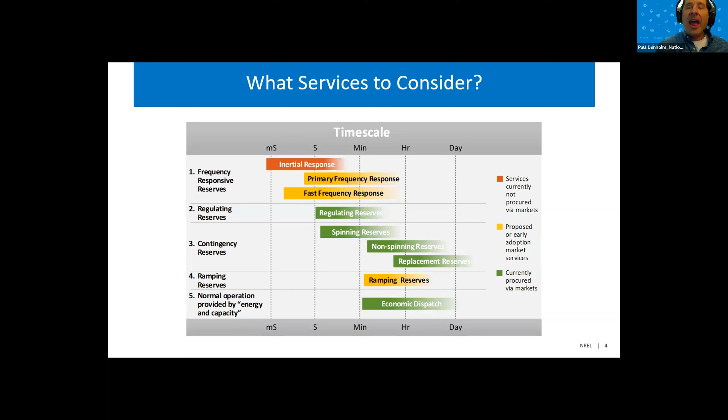So that's the early stage of storage. So when I talk about these 1 hour or less than an hour batteries, a lot of this storage went into those markets for contingency reserves, frequency regulation or regulating reserves. And so we spent a lot of time talking about that. But maybe we don't need to talk about it as much anymore.

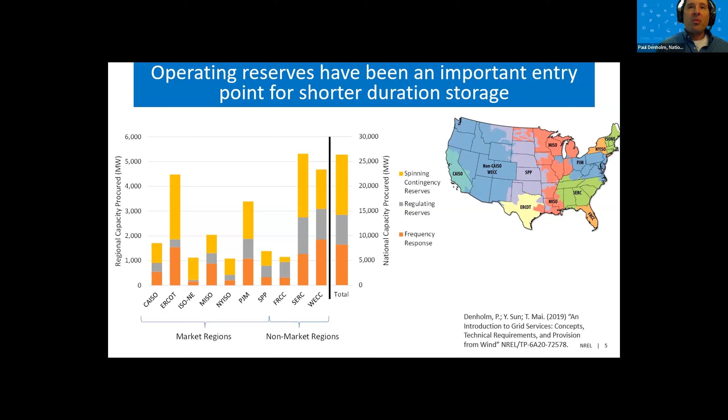This is the capacity required for 3 general classes of these operating reserves. And regulating reserves is the one that storage kind of went after most. And so it's significant. It's several thousand megawatts of capacity. But how does that compare to the amount of capacity we need for peaking or firm capacity? It's a pretty small fraction.

These markets are rapidly saturating or have largely saturated. There's not a whole lot of room for growth for provision of ancillary services. There are some in some places, but in California, the entire regulating reserve market is 300 to 400 megawatts. So there's not a whole lot of room for growth in terms of providing ancillary services from storage.

The focus has really shifted to the provision of peaking capacity. And that makes sense not only because of saturation of the ancillary service markets, but because peaking capacity is now cost effective. We've achieved the break-even point for lithium-ion batteries being cost competitive on a life cycle basis with a peaker, something like a flexible aeroderivative gas turbine.

So if you do a full life cycle cost calculation, 4-hour storage can now compete against a new peaker. So if you've got load growth or if you've got an old peaker that's retiring, storage is now cost competitive. And we're seeing a lot of the storage going in for this capacity resource, particularly that 4-hour storage device.

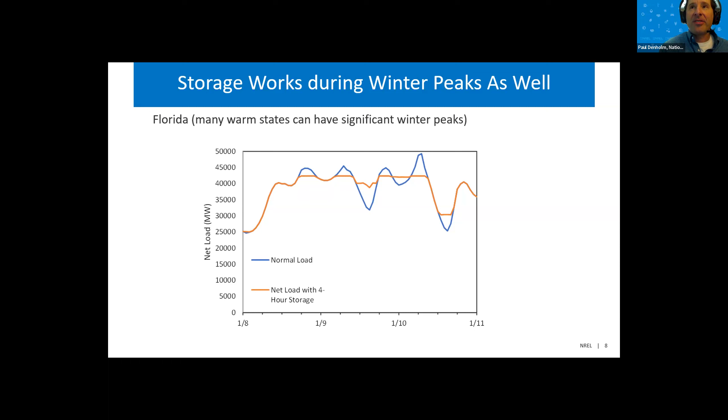Storage often does work in winter as well. You can clip the weird diurnal peak shape, but we're going to come back to this because winter peak is where we're going to see some differences in what particularly 4-hour storage can do.

Okay, so how do we understand the value of storage in providing firm capacity? Because we know that unlike a gas turbine, assuming it can get fuel, it can't run forever. So that's where we have to do some math to understand what is the duration required. So you can do something like an effective load carrying capability calculation to see how can I rate a storage plant. If I've got a 4-hour or 6-hour storage plant of 100 megawatts, can it actually replace a 100 megawatt gas turbine, or do I need to derate it?

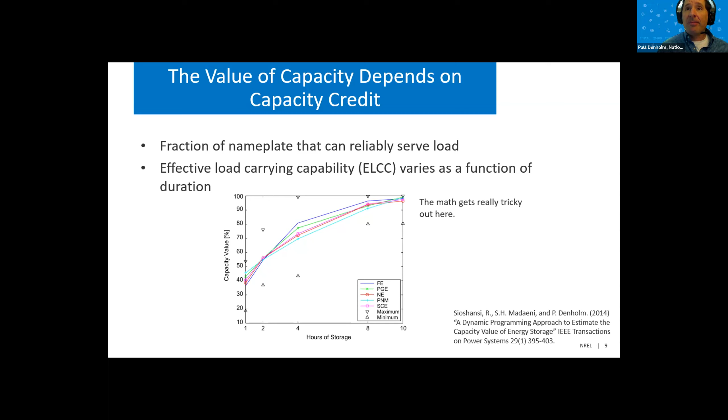And ELCC calculations can be pretty tricky. And so what a lot of markets have done is come up with this simple threshold duration rule. And that basically says, thou shalt have at least X hours to be eligible to get full capacity credit. Now you can be derated, and you can have this linear derate.

So if you had a 4-hour rule, like a lot of locations like California have, you could derate that plant. So if you got a 2-hour device, you could just derate it by half. So if you got a 100 megawatt 2-hour plant, you could rate it at 50 megawatts because you can then discharge it at 50 megawatts for 4 hours.

Okay, so this is what's been done today, and this is part of the explanation about why we saw that big cluster of 4 hours, particularly in California. You need 4 hours to get full capacity credit. So let's just build a 4-hour storage device. And now we can enter into a resource adequacy contract.

So load serving entities in California are required to demonstrate sufficient capacity to meet resource adequacy. So that can be done through bilateral contracts. So a load serving entity can sign a bilateral contract with a storage developer.

And as long as it's 4 hours, that load serving entity can then go to the California Public Utilities Commission and say, okay, look, I've met my resource adequacy requirement through a mix of resources, including some 4-hour storage. So that's what many markets do instead of doing an ELCC calculation, particularly because ELCC calculations can be quite difficult.

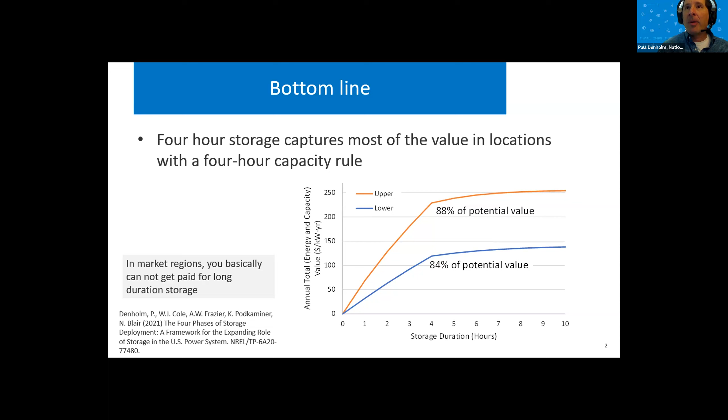This is why you see people building 1 hour storage for ancillary services, some 1 hour storage in places like ERCOT to take advantage of those extremely high price differentials that you see for just 1 or 2 hours per day, and then in places like California building 4 hour storage to get that combination of capacity payments and energy revenue. And 4 hours should be enough for now. When we do the math on these summer peaking systems, we see that 4 hours is enough.

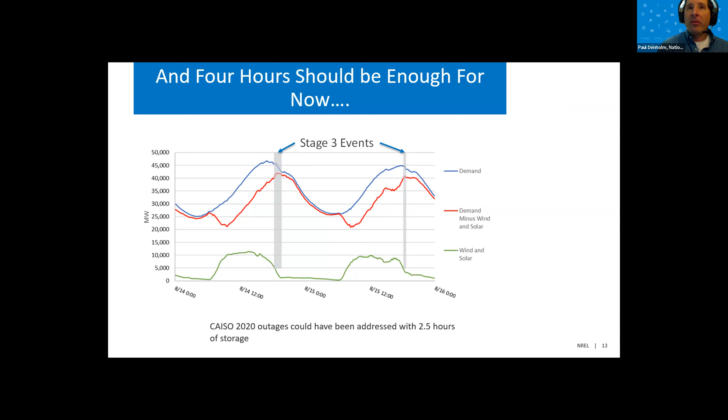Looking at it in a different way: when we've had incidents, especially in summer peaking systems, was 4 hours enough? In California, this is the 2020 outages, and the longest outage duration during those 2 days was about 2.5 hours. So if they'd had 2.5 hours of storage with sufficient megawatts of capacity, they could have avoided those outages. They require 4, but they certainly wouldn't have needed more than 4 to avoid those outages.

Okay, so what happens if we keep adding storage? I showed earlier this flat peak. Well, look what happens on the left. I add enough storage, and my peaks are now more than 4 hours long. And in some cases, it doesn't take a whole lot of storage until my peak is more than 4 hours long, and I would need to go with longer duration storage.

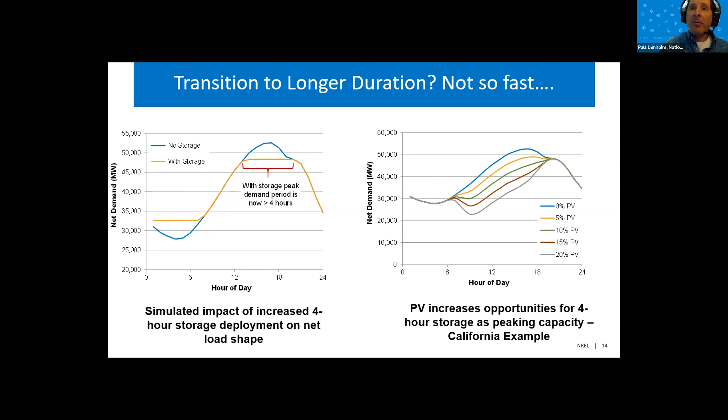And that is true, except again, in summer peaking systems, adding solar will chop off the left half of the peak curve and leave the right half of the peak curve for storage. The combination of solar meeting the first half and storage meeting the second half means that I can go a really long way with 4 hours. 4 hour storage will be able to provide lots of capacity for a long time in the summer, as long as we keep adding more and more solar.

Now you do eventually saturate, you do eventually get to the point where your peaks are longer than 4 hours. But quite frankly, the biggest transition occurs when we essentially shift to a net winter peaking system. And so this is the big deal. And quite frankly, this is the thing that scares me.

Like I thought I kind of had a handle on, oh, this is great. Solar and storage are going to work great together. They're a peaking resource. They're cost effective. We really nailed it. This technology is going to answer all of our needs for peaking capacity. But again, winter does happen, and we're increasingly seeing the shift to winter peaks.

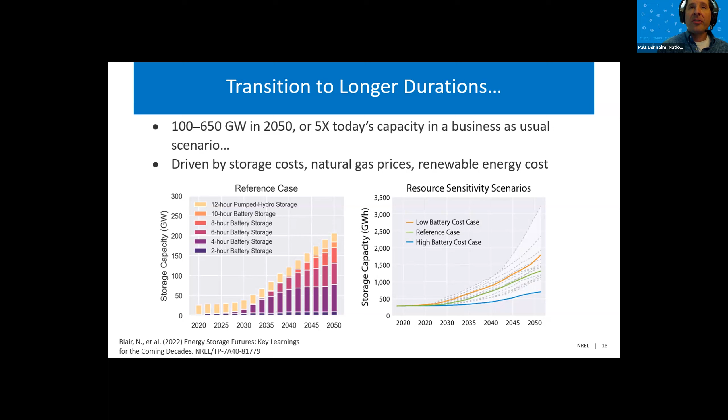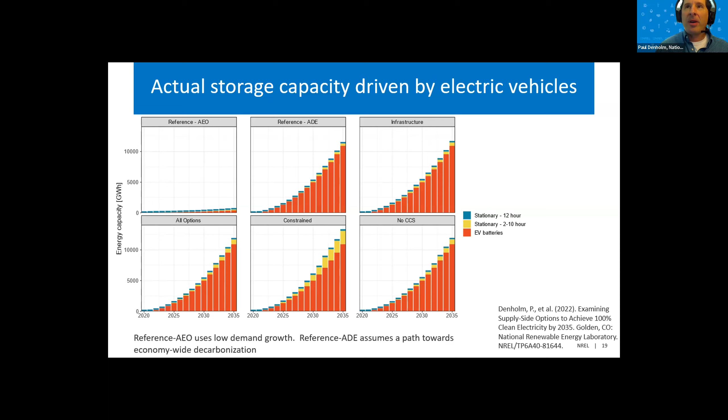That's not really core to my talk, but I think it's important to talk about just because, hey, are we going to be able to build all these batteries? Well, if we can't do it for stationary storage, we certainly can't do it for electric vehicles, because that's really the driving point. So I want to make sure that we had plenty of time for the other speakers and just give you this overview, because I really think the key points here are fairly simple, and that is storage is cost competitive as a source of firm capacity.

So if a utility comes in with an IRP saying storage is the way to go, that raises questions: well, what about traditional resources? That's why. It's because it's cost competitive. And quite frankly, I'm fairly skeptical of IRPs that would come in and say no storage, because again, we're seeing the numbers pencil out.

Now, we do have a recent increase in commodity prices, and we'll have to see how that has affected recent prices. So there may be a temporary blip there. But I do believe that, straight up against the peaker, storage can increasingly compete if you do the analysis correctly. And then again, I think 4 hours is plenty for now and will be plenty for the near future, but it's really this transition to winter peaks that will drive durations beyond 4 hours.

Now, I didn't talk about technologies, and happy to do that, but one thing to keep in mind, of course, is that lithium-ion battery prices are declining. And so increasingly the competition against a 4-hour lithium-ion battery may be a 6-hour or even an 8-hour lithium-ion battery. But there are a number of technologies that are really important to consider, and some of them are emerging in various stages of technological maturity.

But it's great that we have a transition to a talk on thermal storage, because I think thermal storage is often overlooked. We've got a lot of kind of exotic battery chemistries that I think have promise. Again, I'm still a big fan of pumped hydro, but we really can't ignore all of the different technologies, including thermal storage, which will be the next talk.

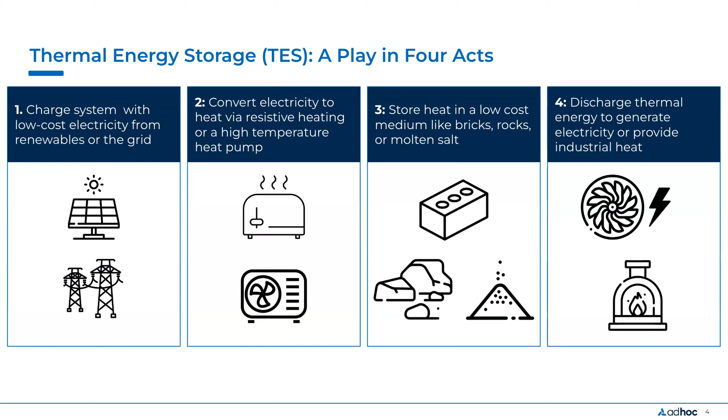When we look at thermal energy storage that's going to be converted back into electricity, generally the application for this, as Paul just alluded to, is for long duration energy storage. And the reason why thermal energy storage is seen as an attractive long duration energy storage application is precisely because that energy storage media, the rocks, the bricks, is so inexpensive.

This means that as you go longer in duration, all you have to do is add more of those rocks or bricks. So while you might have a relatively expensive turbine generating the electricity, that turbine gets amortized over longer and longer durations as you add more and more rocks, making the slope of this long duration energy storage cost line significantly less than lithium ion.

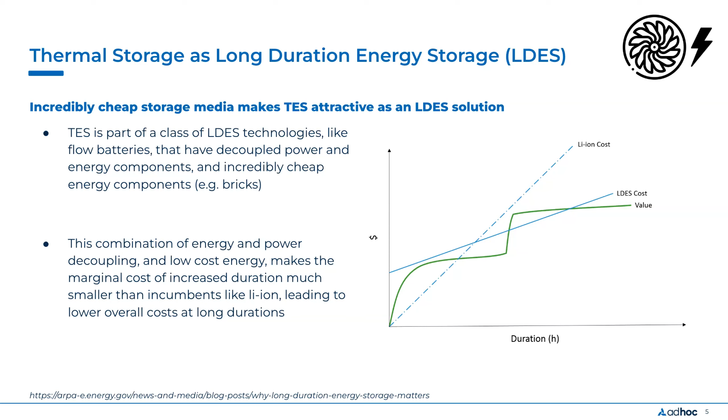Now, for that to be valuable at all, generally you need to get out to a duration, as Paul sort of alluded to, where you're adding some value other than just the energy arbitrage, where it has diminishing returns with duration. And instead you need to be on a system that values that long capacity, and it could be in that winter peaking type scenario.

Transitioning away from the long duration storage application, the bulk of what I'm going to be presenting on here is really thermal energy storage for industrial heat decarbonization. And so this is really what happens when you take that heat and instead of using it to return electricity to the grid, you use it to drive industrial processes. And this is a really large opportunity.

So over 20% of global CO2 emissions are derived from industrial heat. So this is the heating of industrial processes like metal treating, like coking, and a lot of boiling activities. A lot of manufacturing processes use steam in one way or another. That steam is generally generated through a fossil fuel boiler.

So what's interesting is thermal energy storage is able to store this heat relatively inexpensively at very high temperatures, so temperatures in excess of 1500 degrees C. And these temperatures are able to address 95% of these industrial heat applications. And once you're using that amount of energy in these thermal energy systems, it provides some really interesting opportunities for how it might integrate into the grid, which I will get into.

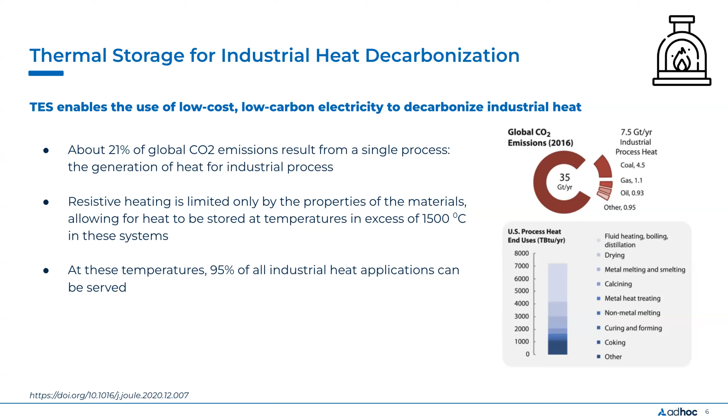So to understand the opportunity here, it's important to understand why this is an opportunity now and what the underlying economics of this opportunity actually are. So why now? Why is this an interesting opportunity to electrify industrial heat through thermal energy storage? And the answer is really the falling cost of renewables. So just as lithium ion batteries have plummeted in cost, so too have solar panels and wind turbines.

And when you look at some markets now, here I'm showing California, when you look at the cost to produce steam using power from a solar PPA versus the cost to produce steam from an 80 to 85% efficient natural gas boiler, you can see that we've actually reached a crossover point where steam from the solar PPA is less than steam from directly fossil-fired natural gas.

This is really a relatively new and monumental phenomenon that you would be able to generate electricity at a per unit energy cost less than from a fossil source on a heat basis, because generally our electricity has in the past come from turning fossil fuels into heat and turning that heat into electricity. And all of those steps have significant efficiency losses.

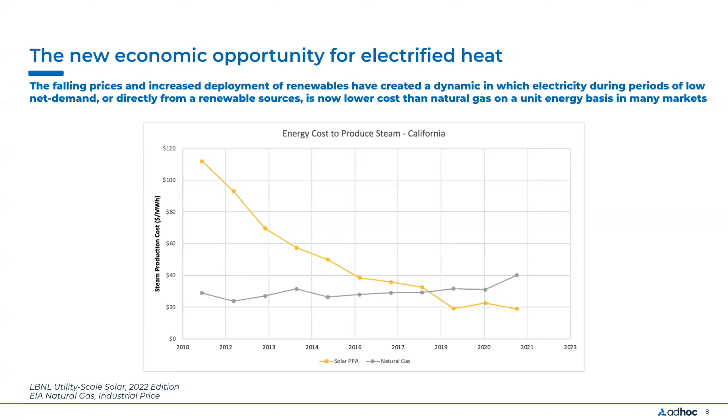Just looking one step further at the unit economics here, if we look at the US average natural gas price on just looking at what it costs to produce steam on a per energy unit basis, that's around $29 per megawatt hour. Now, if you just take the average US electricity cost and try to turn that into steam, it's over 2 times as much as that. So it does not make sense just to take grid electricity at the average rate and turn it into steam.

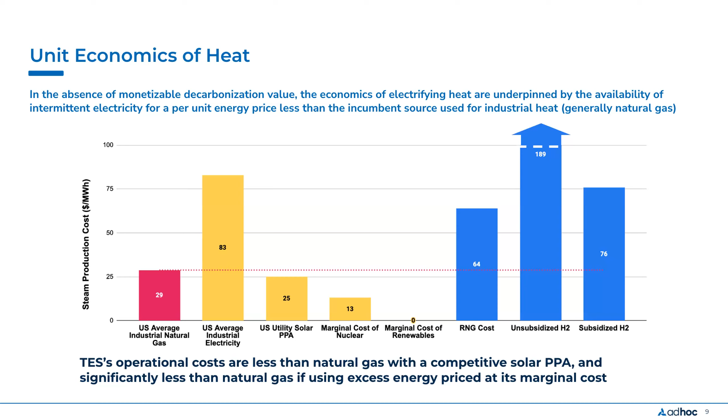But once you start looking at the value or the price of a solar PPA or the marginal cost of some of these resources, what they're actually bidding into the market, at certain times they can be significantly less than that average cost of natural gas. And we see that those costs are also much less than other kind of clean forms of heat, whether that be through renewable natural gas or through green hydrogen, looking both at the unsubsidized cost as well as the subsidized cost of hydrogen if you assume the full IRA incentives.

And so how does this actually interface with the grid, and how does the actual thermal storage element play? So one thing to think about when you think about the flexibility that thermal energy storage can provide on the grid, it's different than other forms of load flexibility we've seen in the past. Traditionally, programs that look to load flexibility on the grid are talking about some sort of demand response program. And in a demand response program, we're taking an existing load and we're incentivizing it to curtail itself at times of high net demand.

So this is saying the grid is strained. We need additional capacity on the grid. We are going to pay you, electricity users, to turn down during this period so that we have enough capacity on the grid. Thermal energy storage, on the other hand, is what we would call a dispatchable load. So this looks different in that it is actually being dispatched at times when net demand is low. And in its base case, it adds no new demand to times when it's high.

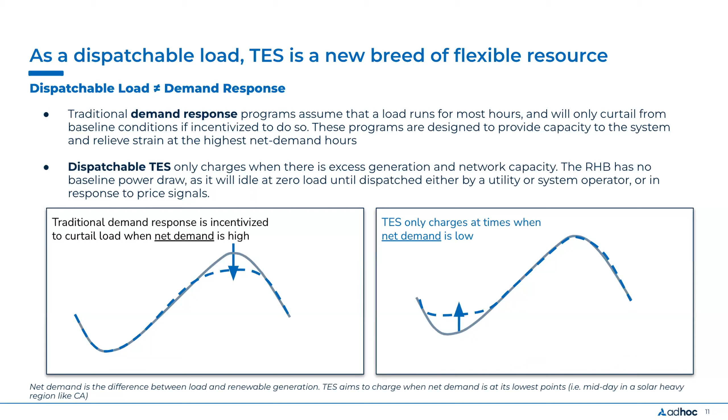So it will have preferably an economic incentive to be deployed at these times when there's excess generation on the grid. These might be times when there is solar or wind curtailment happening. And at these times of low price and high renewable availability, this is when this thermal energy storage wants to gobble up as much of that electricity as possible. And it wants to then be turning itself off well prior to reaching any sort of peak net demands on the system. So this offers a different paradigm and offers a number of highly valuable attributes into the system.

So one, this allows for us to electrify more load and bring more load onto the system while utilizing existing system assets. So this allows for load growth without substantial overbuilds of the T&D system, because these assets will want to be drawing power at times when utilization of that grid infrastructure is low. So it allows us to amortize those system costs over a larger load base.

These systems also naturally have quick response times. As Paul mentioned, these markets for these sorts of ancillary services are fairly shallow, but there are still occasions where having a load that can provide these ancillary services can still be valuable in some locations on the grid. These are also very large. We're talking gigawatt scale flexible assets. So when we're talking about needing to put gigawatts more of renewable assets on the grid, pairing that with loads that are of similar order of magnitude with flexibility allows us to more easily integrate those new renewables onto the grid.

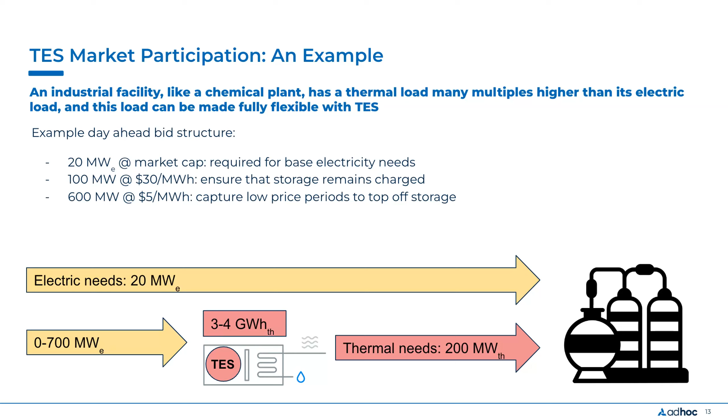So you can see the level of flexibility here is really quite dramatic. It's going from a base load of something like 20 megawatts to an intermediate draw at, say, 120 megawatts, all the way up to being able to ramp to 700 megawatts, if that's what the market dictates is most effective.

So what are the barriers and opportunities for thermal energy storage and heat electrification to actually participate in markets? There's a few challenges that are keeping these systems off the grid right now. One is interconnection bottlenecks, both for these thermal storage assets themselves, as well as for renewables.

Right now, there are actually bilateral deals happening in the market between renewable developers who aren't able to get through the interconnection process to bring their energy to market, and thermal energy storage providers and industrial heat users to, instead of connecting that project to the grid, connect it directly to the industrial facility. Now, from a system perspective, this is suboptimal because we would like to see all these resources integrated into the larger market. It's the market that can help us drive efficiencies and decarbonization economy-wide.

Similarly, there are also accounting protocols in some carbon markets that are incentivizing those bilateral agreements, such as low carbon fuel standards, which force an industrial facility to use a grid average emissions factor if they're generating their heat using grid power, even if they're intentionally doing it at times when we know the marginal emissions on the grid are low. This incentive is driving towards direct connections instead of grid connections.

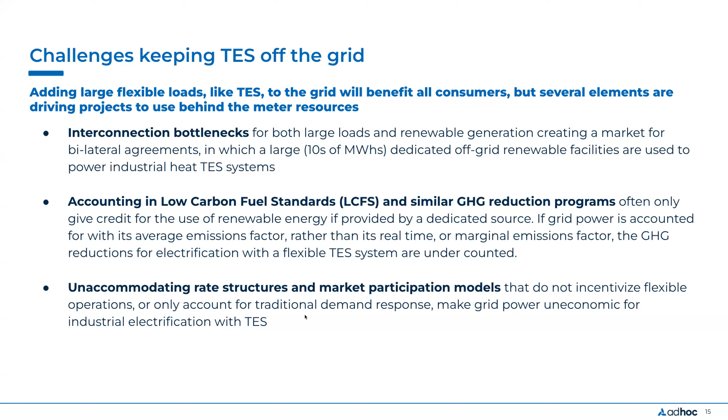So the market rules are really going to dictate what stakeholders can benefit from thermal energy storage and where these solutions actually get deployed. As I mentioned, one of the key factors here is access to the underlying dynamic price signals, something like the LMPs within an organized wholesale market.

It also requires that we look at reducing the number of fees that get put into volumetric fees as opposed to fixed fees, because these systems are very sensitive to the marginal unit cost of energy they're procuring. If a fixed fee is instead bundled into a volumetric fee, that will have a significant impact on the dispatch and viability of these systems. And finally, when we look at T&D charges and other demand charges, charges that are assessed on a coincident peak basis, i.e.

When the whole system is at its peak demand, are charges that these systems can proactively avoid, because they ideally do not want to be dispatching at periods when the system is at its peak. However, if demand charges are assessed on a non-coincident peak, that is the specific peak power that is drawn from these systems, whether it's at a time of grid strain or not, that can really be a killer for these

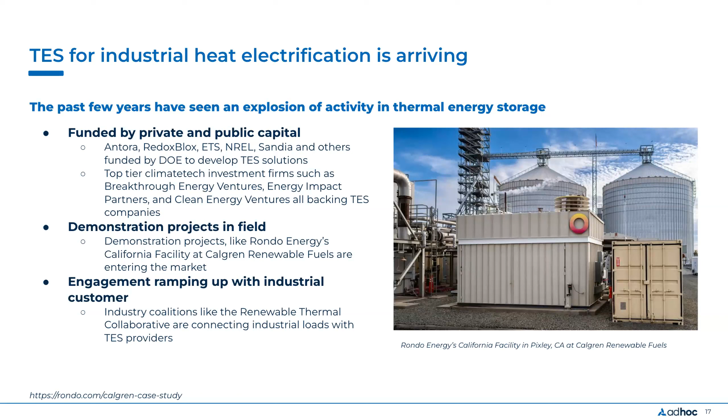So what I will leave this audience with is that this technology is arriving, and in some cases already here. So there's a lot of public and private interest in these solutions. As I mentioned, I'm working directly with Rondo Energy. This slide is showing a picture of their demonstration facility in California at an ethanol refiner. And we're seeing a lot of ramping up going on with industrial customers who really want access to this sort of solution. So I really look forward to talking with this group more in the breakouts.

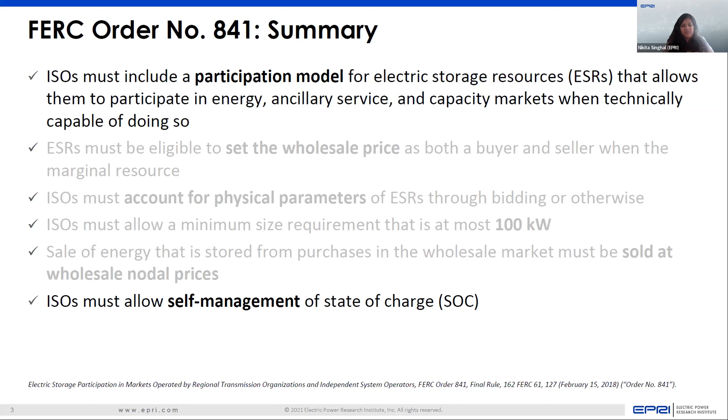I won't go into all the other requirements of the order, but the one key requirement that was significant was the fact that ISOs were required to allow for asset owners to self-manage the state of charge of the assets. And essentially, the ISOs should not solely be controlling the resource, so they shouldn't be operating the resource themselves, but rather also provide the developers with the flexibility to manage the state of charge of their own resource.

Now, what does a participation model mean? The notice of proposed rulemaking basically defined a participation model as a set of tariff provisions that accommodate the participation of resources with particular physical and operating characteristics within these wholesale electricity markets. It takes a lot to represent these physical and operating characteristics of specific resources within market clearing software. So we also mentioned that a participation model includes a set of market clearing software provisions that are required to represent these characteristics.

So essentially, participation model characteristics can include anything that would require change in the market clearing software to integrate a new technology. It can also include what kind of bidding parameters may be needed by a resource to interface with the market, what services they are eligible to provide, and how we can model those service provisions within the market clearing software.

Now, anytime a new technology begins to participate in wholesale electricity markets, there may be a need to introduce a new participation model, but it comes at a significant cost because this requires a lot of stakeholder meetings and also changes to the market clearing software that requires cost, right?

There is the option to modify existing participation models, but that may be inefficient because you may be trying to fit a particular resource into a participation model that may be meant for a different resource type. So you may not accurately capture the efficient features of this particular technology. However, it does have the benefit of being easy to implement and it's already understood.

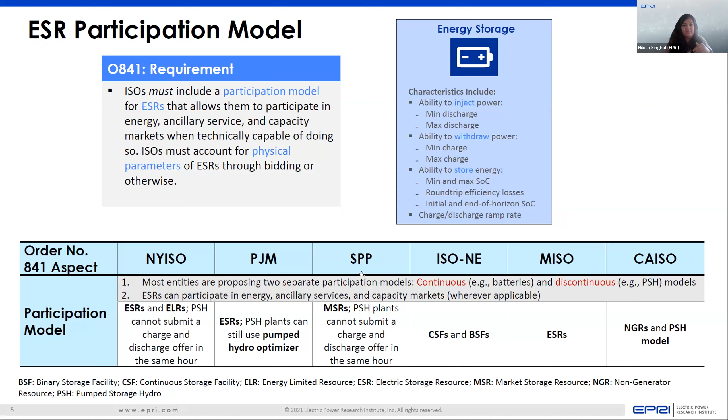So essentially what happened is most of the ISOs introduced two separate participation models, one for batteries, which is a continuous participation model, and the other for pumped storage hydro resources. I won't get into the details of what they call these participation models, but feel free to refer to this slide once you get a chance to.

Now, switching gears to the state of charge management of this specific technology, given that energy storage resources are energy limited, a lot of thought has to go behind how the state of charge of these resources can be managed. There are 4 different ways in which the state of charge of these technologies could be managed. One is self-scheduling the batteries, or the asset owners could manage their own state of charge. So that's referred to as self state of charge management.

And then the last two on the right side are state of charge management light and ISO state of charge management. These two features are when the ISOs are themselves managing the state of charge of these resources and the asset owners are not. The difference between these two options is essentially in the way the market clearing software is designed.

In state of charge management light, some ISOs are using a sequential design for clearing security constrained economic dispatch programs, as a result of which they optimize these assets on an interval by interval basis in a sequential manner. Whereas a subset of the ISOs solve the problem using multi-interval optimization, which is more efficient, because you get to look at multiple intervals in a single snapshot, right? So that's referred to as ISO state of charge management.

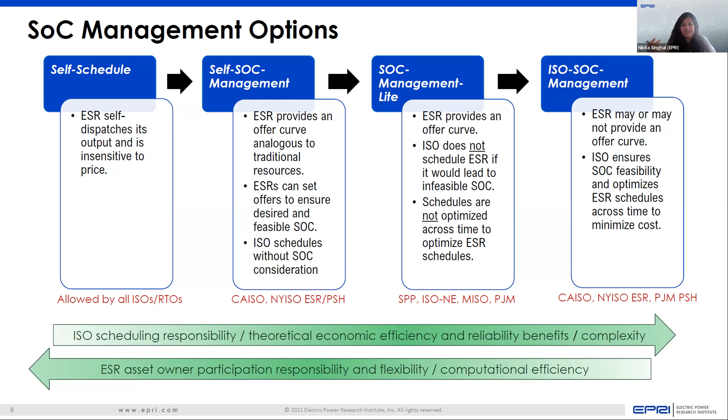We did a study to understand how these options would impact the theoretical economic efficiency and reliability benefits for a test case system, to better understand what role the state of charge management option may play. I'm going to briefly go over the results from that study. On the left chart, the results have been shown for a scenario that had low renewables and low penetration of batteries as well, whereas on the right side, the chart shows a high renewable scenario.

The first bar graph shows the operating costs that were obtained from the system without any storage. And then the same sequence as the previous slide has been maintained, wherein the second graph shows the self state of charge management costs. The option where you're sequentially solving the market is the third bar chart, and then the fourth bar is the ISO state of charge management, where you're doing a multi-interval optimization.

So one thing to note is that the lower the cost, the better it is for the system, right? So you can see that the ISO state of charge management option results in the least operating costs. So it was found to be economically the most efficient option. It did also result in the highest profits for these assets. So from the asset's perspective, their revenue also would be higher with the ISO state of charge management option.

Whereas the self state of charge management option, in fact, resulted in increasing the cost. You would think, why did this happen? Well, when the asset owners are participating in the market using offers, it may be the case that they may not actually clear at a point that they anticipated to clear, and the state of charge in real time may not be exactly what they wanted it to be. As a result, the schedules may look totally different in real time when compared to day ahead. Then the system operators are forced to rely on some expensive units that come online at the last minute, and that increases the cost as well.

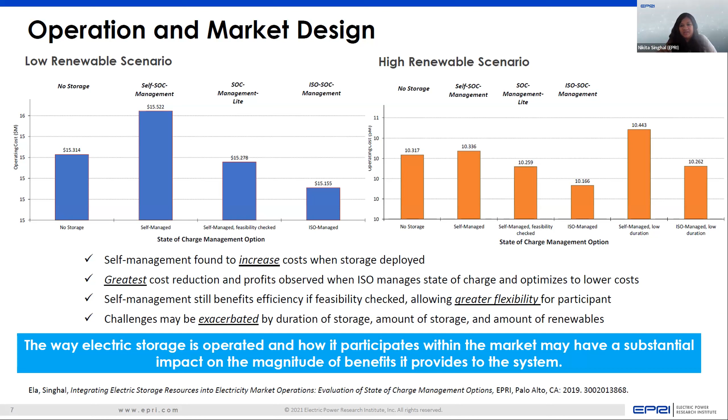So essentially, this is important because the way you operate an electric storage resource and how these resources participate in the market can have a significant impact on the magnitude of benefits that we can obtain from these technologies. And the same results were also seen in the high renewable case, but I won't get into the details of that.

Now, there is one specific aspect with these technologies. I think Paul gave a nice introduction about how 4-hour batteries are what we are beginning to see, right? And it's enough to clip the peak demand. But there is a big issue when it comes to market clearing software design. This is because we solve multiple markets on multiple timescales. For tomorrow, you solve a day ahead market today. And in real time, you then solve another market because you have better forecast accuracy, so you update the forecast and resolve the market in near real time.

Day ahead is a means of making sure that your long start units, which have longer minimum up or down time constraints or a startup notification, can be started up in advance of the real time market. So using these multiple time scales can complicate the state of charge management of these new technologies, particularly because the day ahead market solves the entire day, 24 hourly intervals, in a single shot, whereas in real time, the majority of the ISOs look at most 3 hours ahead.

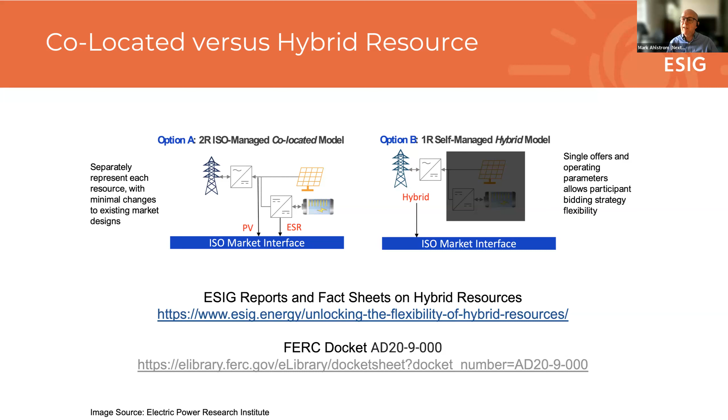But as we'll see, that might change in the future because, as was also pointed out in additional EPRI work that we could show you, there is increasing concern about the computational complexity and just the overall complexity of the ISO RTO, whether that's what they ought to be focusing on in the future. So that's the difference. Co-located and hybrid can be exactly the same hardware system. It's just really how you look at it from a participation model point of view.

So this philosophy is really that if you're doing a hybrid as a single resource, it's really looking more like an intelligent agent for a system of technologies that offers this energy and services at the point of interconnection, the POI, really just like, in a sense, a more ideal conventional resource, but with more flexibility and fewer constraints because of its use of energy storage, power electronics, and software, right? It becomes a more ideal resource in the sense that you probably don't have to worry about startup times or ramp rates. It's got so much flexibility, and you can control this software any way you want to provide these services.

Said another way, I've generalized this often before. I say, you give me enough energy storage, electronics, and software, we can emulate any kind of electrical machine you want to see at that point of interconnection, right? What exactly do you want it to do? Julia's going to talk about this in another sense, really more the hardware interconnection, about how we can use this flexibility. Very important topic, but that's dealing with a really fast interface with the grid and what happens during disturbances and so forth. I'm talking here about how I can also do this at the larger market participation model type approach, about how we actually philosophically look at resources in the future.

Now, the other thing that's really driving this, and I think Paul alluded to some of this too, is that when we start combining storage and PV, we see very quickly that in almost all of these new inverter-based power plants, we're actually overbuilding the capability inside the plants already. Anybody building a 100 megawatt utility scale PV plant, just PV alone, might have 100 megawatts at the point of grid interconnection, the injection limit, the max you can inject into the grid, but you're likely to have maybe 140 megawatts of PV panels behind that inverter inside the plant.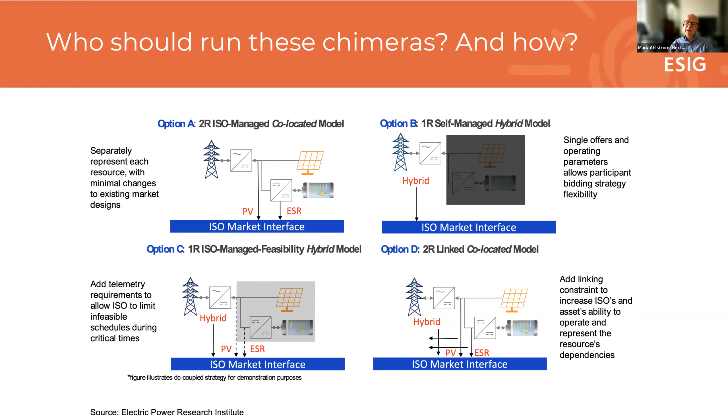And similarly, in option C, we're really asking who should deal with the infeasible dispatch that could result if you clear me for certain services and I can't simultaneously do those from these two pieces because you've over-dispatched me. It gets very complicated; I won't go into details. But the question is, who should take on that problem? Should it be the system operator, adding even more complexity? Or should it be the hybrid operator, using its own analytics to offer services with penalties for failure to perform?

So here's what really drives my thought on this and why I've spent a lot of time on it over the last 4 years: I'm getting old. I've seen a lot of stuff. I was in the software industry for over 20 years before I got into energy by accident, actually. So yes, if we want an optimal solution, as we found with software, we could just write a continuous monolithic top-down program that squeezes everything possible out of the hardware, right? But it didn't take software long to figure out that these machines were rapidly, exponentially getting more and more complicated.

So we had to deal with this complexity, right? So how do we deal with this complexity? System architecture became important. And the way that software did this was to say, look, I'm not going to just write a continuous stream of low-level code to optimize this stuff. It's just not worth it anymore.

I'm going to organize into subroutines, and that moved into object-oriented programming where you would have separate objects that did different functions. And that's gone all the way now to service level interfaces and intelligent cooperating agents where you say, look, this is your energy factory over here. I don't care how you do it inside your walls. I just care about how it interfaces with me and provides the grid services and energy dispatch that I need, right? Make it somebody else's problem.

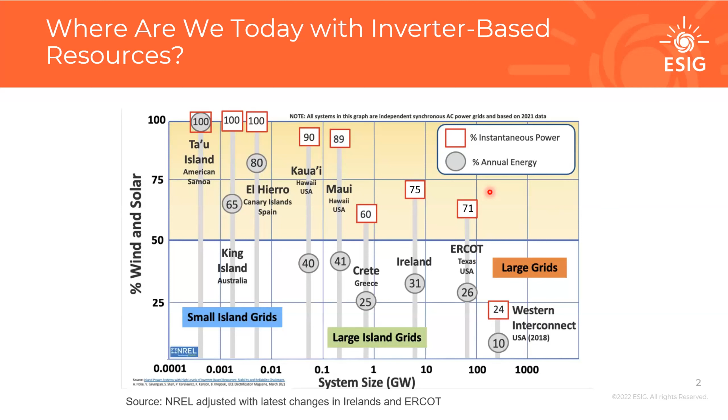Last year in April, ERCOT actually reached 71%. So basically, during shoulder time in spring, in the beginning of the day, when the sun started rising already, so they got some solar penetration and wind was really high, they got to 71%. So we're getting into these high numbers, and we're starting to see some new operational challenges.

So both of those challenges actually stem from the fact that most of the inverters today, wind, solar, and storage inverters, are so-called grid following. So what they do, they read a signal, voltage and frequency from the grid, and they lock onto that and they inject power into the grid, which is aligned with the signal that they read. So basically they use the grid as a reference. And the signal comes from traditional synchronous generators. So think coal-fired, gas-fired, hydro generation that we have today.

And so the further the wind and solar generation pockets are from synchronous generation areas, the weaker the grid. And then if the grid is weak, then the signal that inverter-based resources are using as a reference is easily perturbed as these resources are injecting power into the grid.

And so it may be hard for inverters to lock on the system correctly, and this may lead to instability challenges. This is illustrated on the right-hand side with an example of ERCOT. ERCOT in the west side of the grid has a very good resource for wind and solar generation, and currently gigawatts of wind and solar generation are already installed in this area.

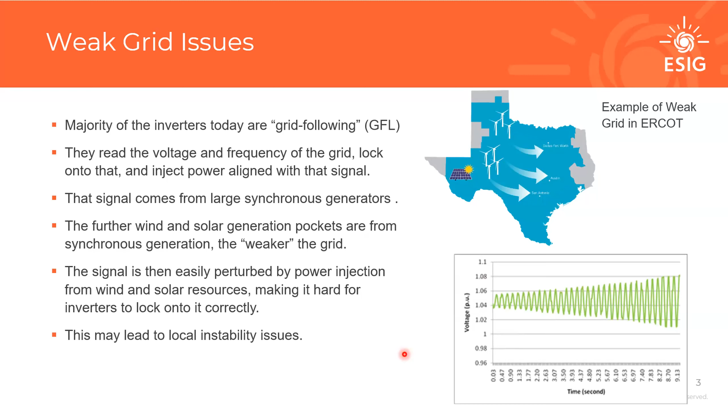Another issue, and you might have heard of it, is a problem with synchronous inertia. Following a resource trip, so a generator trip, the initial rate of change of frequency is solely a function of synchronous inertia on the system. Today, this inertia is provided by synchronous machines. With increasing shares of inverter-based resources, there can be periods when the synchronous inertia on the system is low, because there is less synchronous generation available, because some generators retired or are not committed at the time. So they're not online and providing inertia.

Why is it important? Because it determines the time that any frequency control or frequency response mechanisms have to respond to this frequency decline. If this time is insufficient, frequency decline is too fast and it can trip under-frequency load shedding. So basically involuntary load shedding may happen if frequency decline is too quick. That's where the problem is.

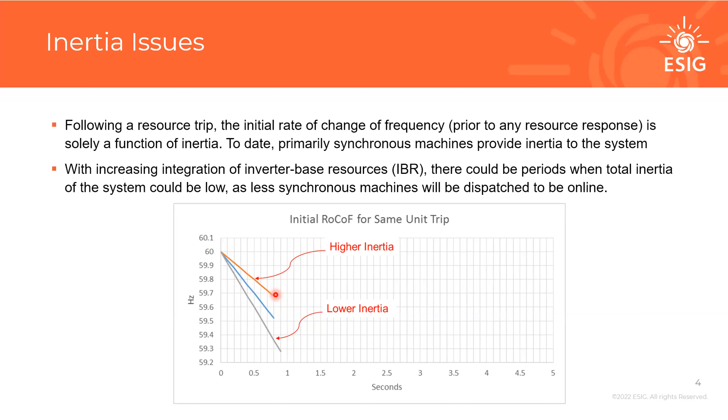As I mentioned, traditional inverter-based resources, wind, solar, storage that we have installed on the systems today, are grid following, and they are not contributing to system inertia or providing system strength. They also displace synchronous generation in the dispatch or in unit commitment, and that may exacerbate weak grid and inertia issues because then there is less synchronous generation online that traditionally has provided some of these services.

Additionally, grid following inverter-based resources require sufficient system strength to operate stably, and they also require sufficient inertia if they are providing any kind of frequency response, basically to be able to measure frequency change and provide frequency response service. So possible operating issues with a high share of this type of inverter-based resources are that we get deeper frequency deviation after generator trip events because inertia is getting lower.

There can be control interactions between inverters in areas with low system strength. There can be issues with resources riding through system faults because of reduced system strength. There can be protection issues because it becomes hard to detect that a fault is happening on the grid, and also diminishing black start capability, because synchronous generators traditionally provide black start service to the grid, and as they retire, there may be a smaller pool of black start resources that operators can rely on.

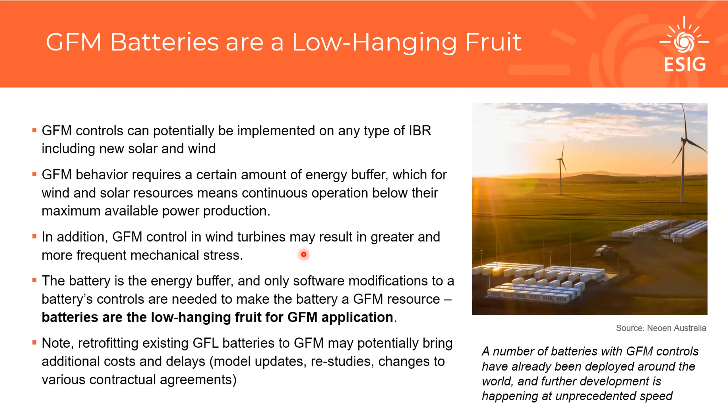And that's a fair question and a fair thing to consider, but retrofitting existing grid following batteries into grid forming controls, even though it's just software, still potentially brings additional costs and delays because it requires model updates, restudies, and changes to various contractual agreements. So this option needs to be carefully evaluated against the option of going for grid forming batteries upfront already now. So not only is battery a low-hanging fruit for application of grid forming controls, we also currently find ourselves in a unique window of opportunity to deploy grid forming capability on batteries.

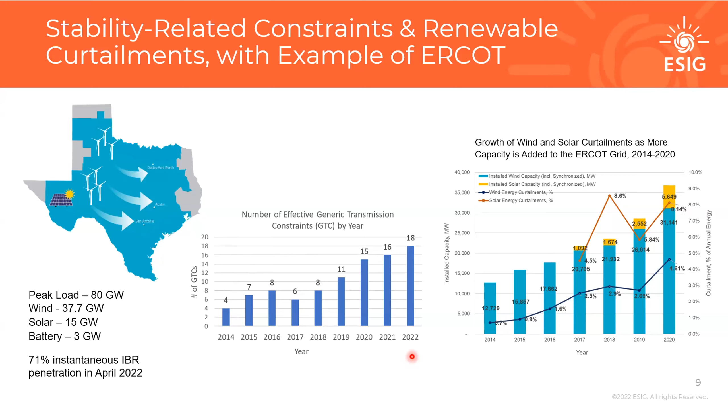Another solution that can be looked at is building more transmission. And so this transmission here is not needed for additional transfer capability, but it is built in parallel with already existing export paths from the weak grid area. And what it does effectively, it just reduces electrical distance from a weak grid area to stronger grid, basically making the weak grid area stronger. But it's very expensive because you need to build these large transmission lines that actually are not just for current carrying capability, but rather to effectively bring inverter-based resources closer to a strong grid source. But anyway, to summarize, all of these methods are resulting in additional transmission costs.

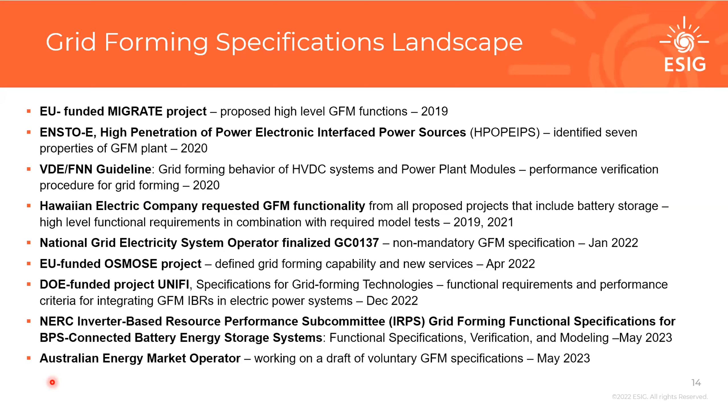And very recently, at the end of May, Australian Energy Market Operator released their non-mandatory requirement for grid forming inverters. So even though there is a list of requirements and you may think they may be different, and they call capabilities different things and use different terms, overall these capabilities that they're seeking are pretty similar, and that's very encouraging because it means that there is no big diversity between what operators are looking for. And so I have the list of these requirements.

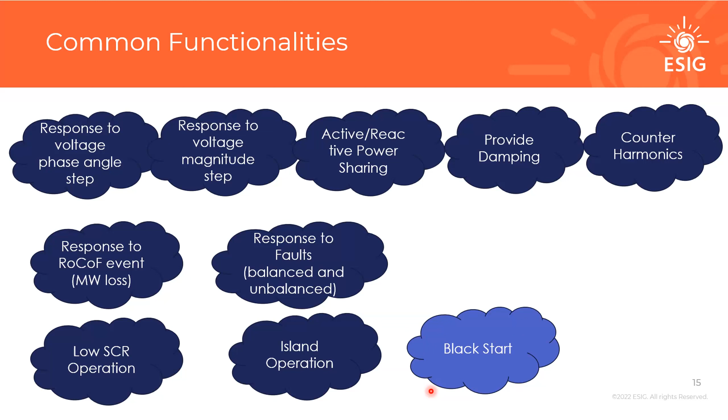I won't be reading it through, and I have this Black Start capability as a separate thing because not all of the resources need to be Black Start capable, and that requires additional hardware to be added. So just in conclusion, the specifications for grid forming inverters are developing together with controls. They use similar terms across the specifications that are available today. Some requirements are more specific than others, and in some cases, the requirements are accompanied by performance expectations during testing, testing applied to models and testing applied to hardware.

And currently balance is needed between incentivizing desirable behavior, but also allowing some freedom in control implementation, because the controls are still an active area of research and are being developed. High-level requirements accompanied with test specifications are the recommended approach today. And then some functionalities can be implemented also in grid following inverter-based resources, and they should be left out in grid forming specifications.

So just to summarize all that I was pitching for today, we have an opportunity to future-proof our system by deploying grid forming control capability in batteries today, because it's a low-hanging fruit for solution in weak grid situations. And the opportunity for system operators and utilities to utilize this low-hanging fruit may soon pass because we have interconnection queues full of batteries that, in the absence of any incentives, will be built as grid following, and then we'll need to install additional equipment on the grid to support them.

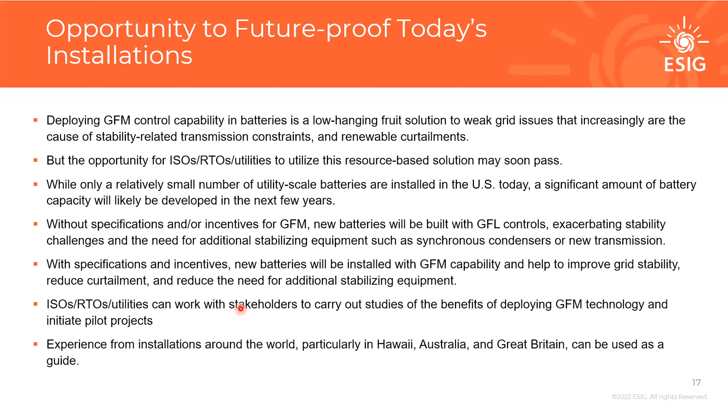System operators and utilities can work together with stakeholders to carry out studies and look at benefits of deploying grid forming technology on planned battery projects already today, and they can use experience from existing installations around the world and experiences with grid forming specifications from Hawaii, Australia, and Great Britain as a guide. And with that, thank you very much, and sorry I went a bit over time.

No worries at all. Thank you so much, Julia. That was a great introduction to how we can future-proof tomorrow's system by adding a cheap piece of technology today. And I'll just add, you talked about Kauai. They have some of the earliest experience with hybrid systems. I was in a storage meeting with them, and someone asked if there is anything you would do differently in your storage experience. And they said they would have put grid forming controls on all their batteries.